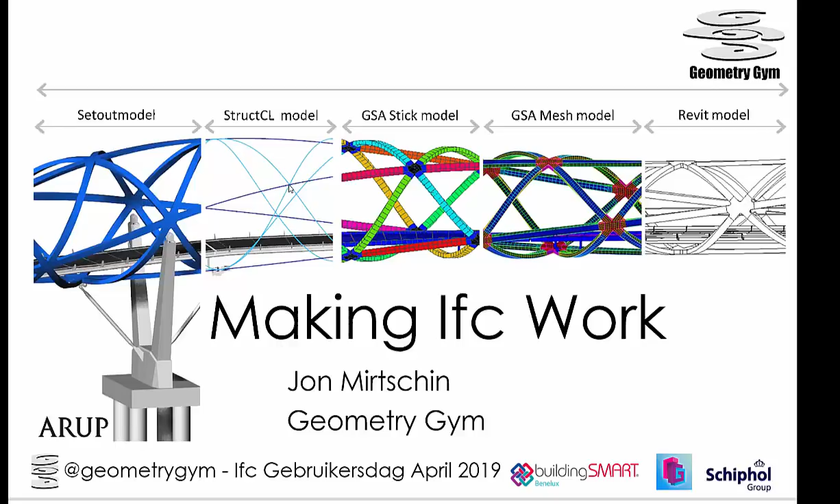Thank you. Unfortunately, my Dutch is very weak. Having done a little bit of work with Mark and Martijn, it improved a little bit, but more about what an air terminal is and a few services equipment rather than to be able to present in Dutch. So excuse my English.

A quick background to me. I think one of the key things that seems to be a point of difference or a point of benefit with myself is I come at this with dual experience and dual training. So you'll see that I actually studied a double degree in structural engineering and computer science. And I did work as a structural engineer for about 10 years at 2 different companies. And then I developed some tools that helped me do the tasks and jobs that I had to do on the projects that I was assigned.

I was pretty lucky, a lot of sports stadiums, an interesting footbridge or two, and a couple of towers. And I guess with a computer science degree working as a structural engineer, I wrote some spreadsheets and some little utilities and things like that that helped me do my job. And that kept snowballing. When I moved to London and worked for an offshoot of Arup called Expedition Engineering, I started learning about this application called Rhino and then getting more into actual plugin development and tool development.

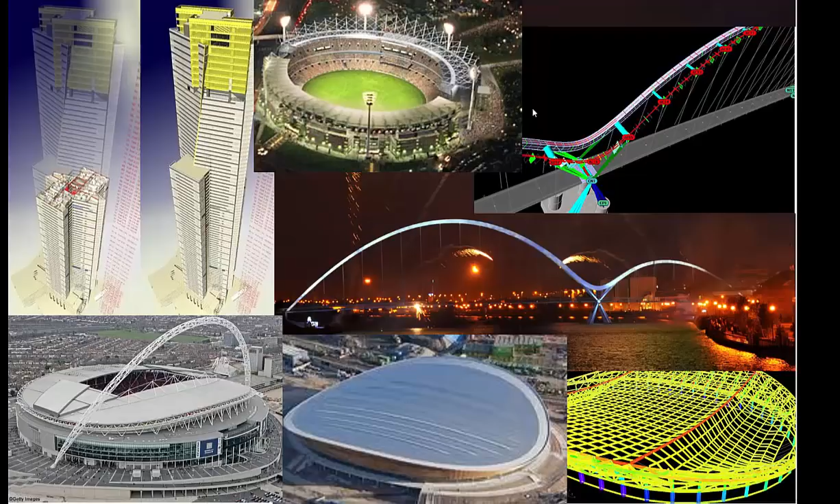Anyone that's used Rhino, which I'm going to talk about a little bit, will know it's a pretty powerful scripting and programming environment. So again, it snowballed. Others in the office started using some of the tools I developed for Rhino. I started letting Arup use them. And when Arup were dependent on it enough that I could start charging for it, I formed the business Geometry Gym. And nearly 10 years later, still working at it, which is great.

So just some other quick background information that might give some insights into some of the things I'm going to talk about. You'll hear I'm from Australia with an Australian accent. I am an elected board member on buildingSMART Australasia. I am involved with buildingSMART International, particularly with the Model Support Group. So the Model Support Group is in charge of managing the improvements to the schema and the IfcDoc tool that Alex mentioned and a few other technical aspects of supporting Open BIM.

And then the technical room, a common participant in that, particularly at the summits and the endeavours outside of the summits. Also do some consulting to Autodesk. I guess someone that knows IFC intimately and knows the Revit API a lot is something of benefit to them. So I have been involved with helping them with nominated tasks about import and export of Revit. Some of those were use cases that particularly came from here in Holland and in France.

So I saw a lot of discussion around the project base point export settings, and I don't know if I should put my hand up for some difficult questions, but I was involved in that. So depending on what conversations happen after this session, if you want to talk about that, it's possible.

Any presentation I do gets pretty technical, but again, I'm going to try and keep that capped today and, as Mark said, I want to demonstrate some use cases of IFC, maybe the way you haven't seen them before, and to explain what IFC is. No, not everyone should have to go into understanding IFC the way that I do, and we'll talk about some of the improvements that we should seek and demand to make that easier for everyday use of IFC as an exchange format or Open BIM.

Who here's seen the End of Babel video? Only a few. I think it's worth playing. It explains IFC better than I can. I can never watch this enough. So I've cut this down to a shorter version. And if you've seen it all before, I'll stall it if you like.

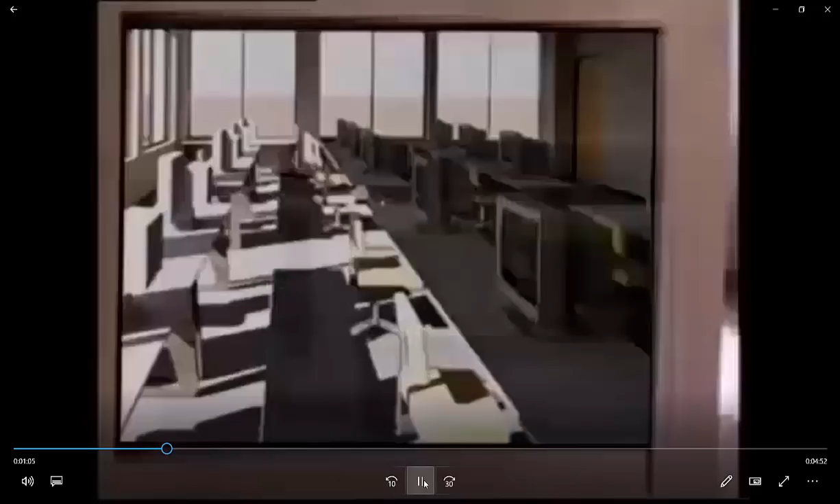But not too long ago, thanks to technology, there came along an amazing invention that actually made this problem worse. What is it? The desktop computer, of course. Everybody's got one of these things today, and we've all set about busily automating every task we can think of.

On a project like this one, for example, the designers have automated their drawing production, and the structural engineers have automated their calculations for determining the size of members, and the HVAC people have automated their calculation for thermal performance. But they're still not really communicating. You see, we haven't improved the processes that connect these tasks together.

And that's because the software packages that make this computer do its job are made by hundreds of different companies. And each software program has its own way of defining terms for the computer to understand. So they all talk to the computer, but they don't talk to each other, which means the people who use them can't do a very good job of talking to one another either, at least not with their data files and electronic drawings and documents.

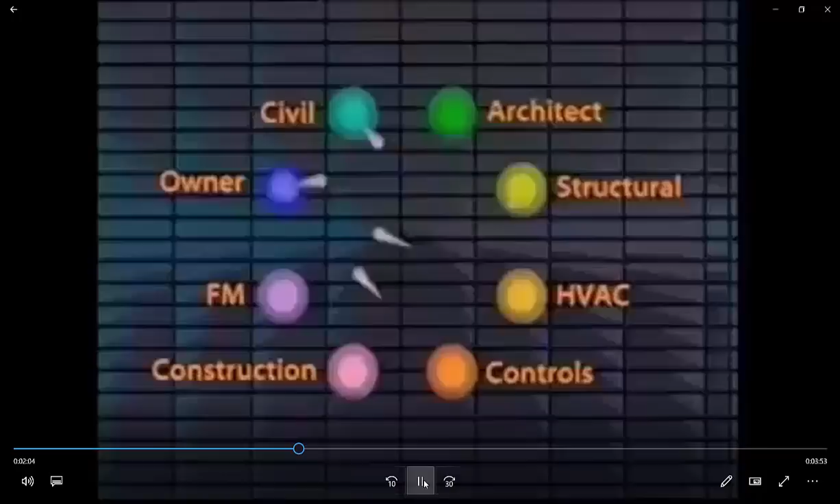And why is that a problem? Well, on a big project like this office building, for example, our fractured information system, this one we're all using, results in information that's often incompatible, inconsistent, or redundant. You can imagine what something like that adds to the cost of something like this. When you come right down to it, we're all wasting a lot of time.

For example, an architect does an initial design and passes it off to the structural and HVAC engineers. Now, they all work in parallel, isolated, making changes as they see fit. When they get back together to try to integrate all of their decisions, well, the results are something of a mess. It takes iteration after iteration to finally get it right.

But there's a move afoot to change all that, to make all of the software packages talk to each other, to make them all operate from a single shared building model that provides a common language for defining a building project, kind of a universal compatibility. It's being spearheaded by a company called Autodesk, in collaboration with industry partners such as AT&T, HOK Architects, Honeywell, Carrier, and Tishman Construction, to name a few.

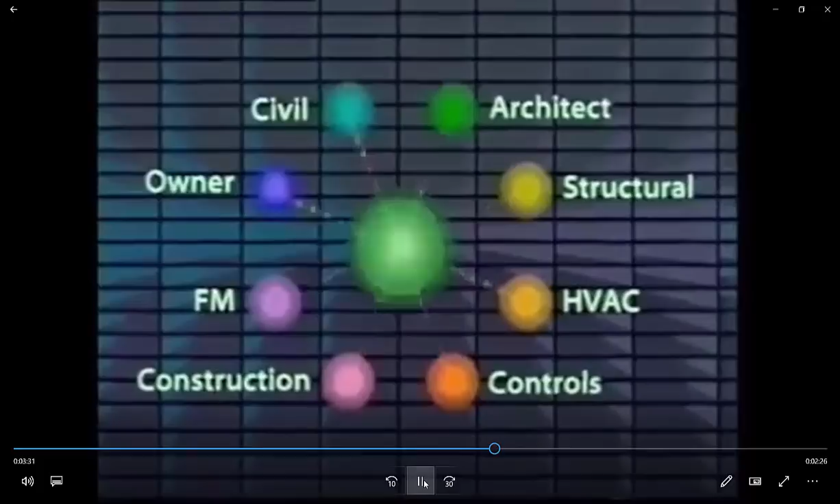The idea is to have industry-wide definitions for every object we use to design, construct, and maintain buildings, and then to create industry-standard definitions for the relationships between these objects. What we're really talking about is interoperability, making things work together no matter who creates them, no matter who's involved. Sounds like a good idea, so you've probably got just two questions. How much will this cost me, and when can I get a hold of it?

Well, it's not likely to cost very much at all, if indeed it ever costs you anything. The expense for the project is part of the research and development budgets of the corporations who are participating. The end result will simply be a new foundation within the software you buy. It will likely first appear as a feature of your next upgrade for AutoCAD-based applications. Then you'll find it in a growing number of non-CAD applications that can add information to the shared building model.

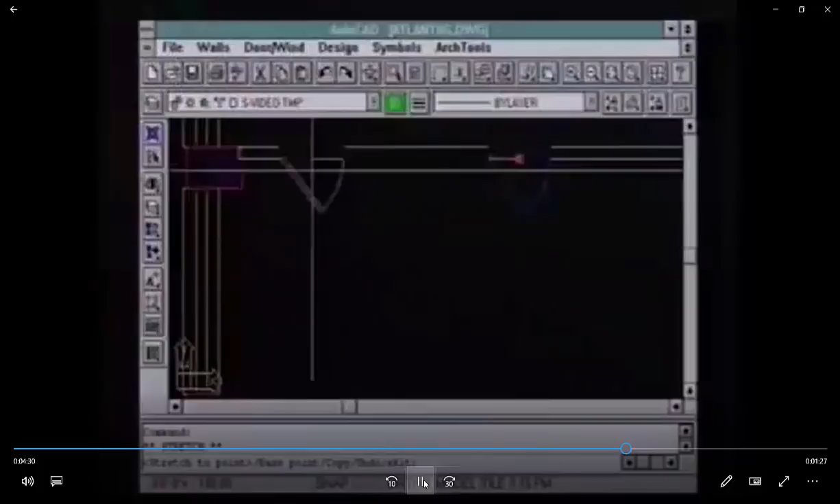It's easy to implement, so you're not looking at much for transition costs. There's no special hardware or peripherals or add-on software to purchase. In other words, it's more or less free, which is a pretty fair price for everything this project delivers, wouldn't you say? And now, when can you get your hands on it? Finished applications are still a few months away, but prototypes are already up and running. You can see them today at an Autodesk demonstration.

If you really think about buildings and the things in buildings, furniture, equipment, and so forth, you're really talking about objects, not lines on paper. Well, for the first time, the power of the computer and now the very imaginative creators of software are allowing us to come back and think about buildings in a fundamentally different way, as collections of objects. And the foundation classes are about objects.

Autodesk's goal is to lead the way to a place where technology works the way it's supposed to. Open systems and partnerships are part of Autodesk's corporate philosophy and have been since the company's beginning. They believe that having more choices is inherently better than having fewer choices. And that's what this alliance is all about.

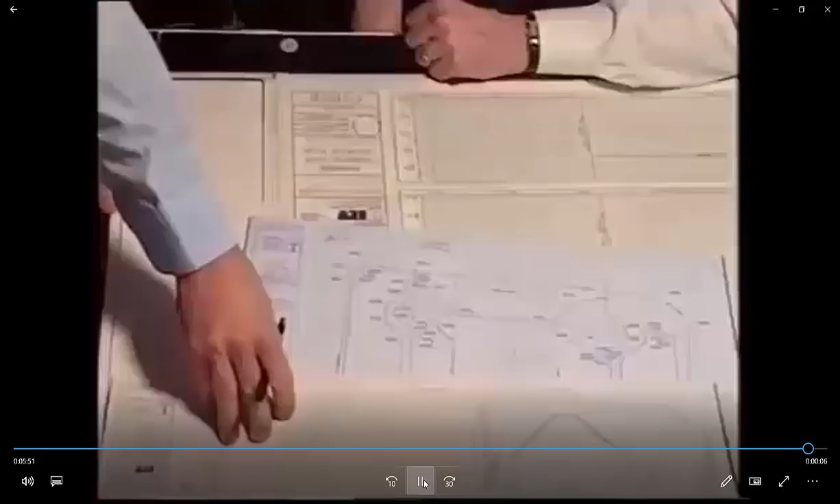They're leading the industry into the future, investing in new ideas that lead to better tools and better processes. This is technology gone right. This simple idea will let you capitalize on the promise computers made years ago. Finally, this will make it all work the way it's supposed to. It's an end to the technological Tower of Babel.

Apologies to those who might have seen that video before, but every time I watch it, I want to cry and laugh at the same time, because you might have picked up that it wasn't recorded yesterday. The message is as true as it's ever been, I think. This was recorded about 20 years ago, and it's a bit unfortunate that we're still working on advancing some of the promises and realizations made all that time ago.

I think it is great to come to Holland as well, because I really do see a strong push on Open BIM and actually achieving some of these goals. So it's nice to come here and meet many of you and have a chance to explain some of the work that I've been doing and Building Smart have been doing to make that a reality.

I mentioned before the use case of IFC, and in particular IFC 2x3, which had only one particular use case, which was coordination. Typically the model quality you'll then see is the model on the left-hand side. You only need a primitive model for coordination.

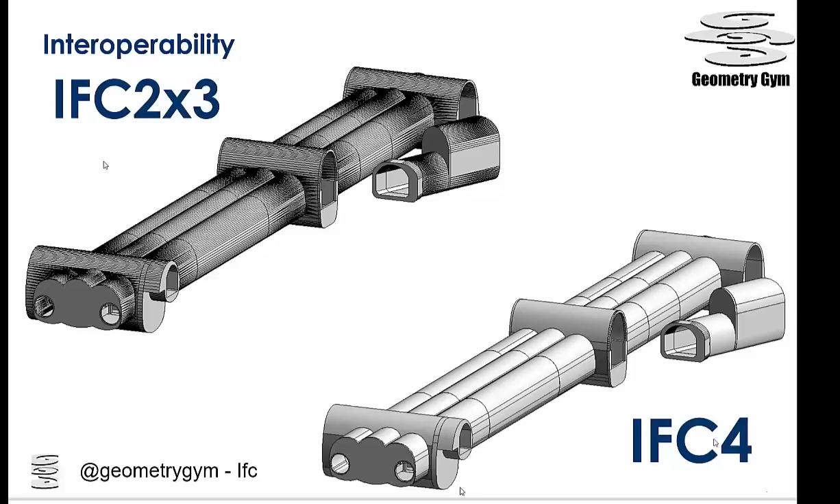I guess the emphasis of my work has been on design transfer. Coordination is an important use of IFC, but a lot of the work I'm going to demonstrate to you today is more about how do we actually use IFC for the more intelligent model use cases downstream?

I also think it's quite frustrating to be a user of IFC. With a hybrid background in structural engineering as well as software development, I can put both hats on. When you're producing IFC files that are gigabytes in size, that's not particularly a good sign, and it shouldn't be the case.

Again, I can only encourage you, if you are having frustrations and problems with IFC, put the pressure on your software vendors to improve these things.

Typically for IFC 2x3, the two primary shape representations used are an extrusion, or if it's not an extrusion, then just mesh the thing. Then if you get objects like fasteners or a light fitting or anything that's not an extrusion, you end up with these great big huge IFC files, because it meshes it normally to some sort of visualization tolerance, whereas a lot of what we're looking for in BIM is an idealized representation.

This is showing an example of some work I've done recently on decimating NURB shapes in Grasshopper and Rhino. I know in particular Revit have made some improvements in this area to try and reduce file sizes, but again, we can only push them harder and harder.

We really shouldn't be - if your file size is not proportional to the size, noting that IFC is a text file normally - it should still be proportional to the size of your native proprietary file, not magnitudes bigger. I'm going to talk a little bit about Generative BIM.

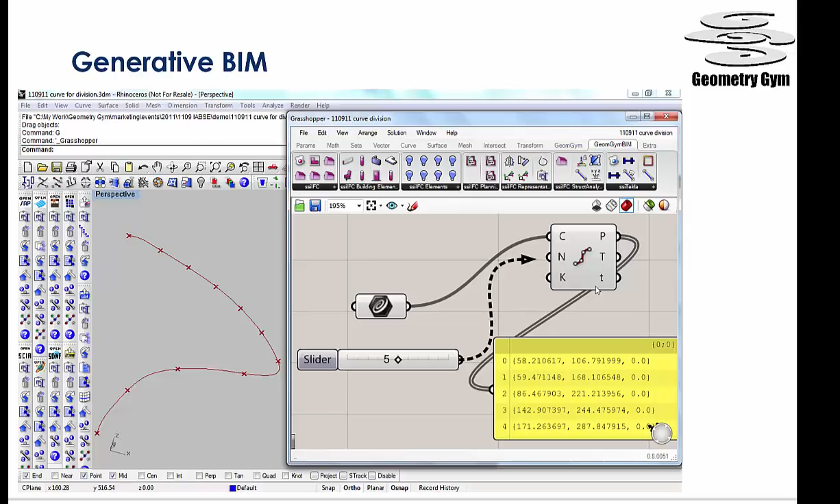I'm pretty sure everyone here would have heard of Dynamo as a graphical programming environment. Anyone here, how many have used Grasshopper? A few, good, okay. In my observation, Ian started Dynamo as he was using Grasshopper as an engineer, and he wanted Grasshopper for Revit, and that's what motivated and inspired him to start writing Dynamo. It has a very strong resemblance to Grasshopper, obviously.

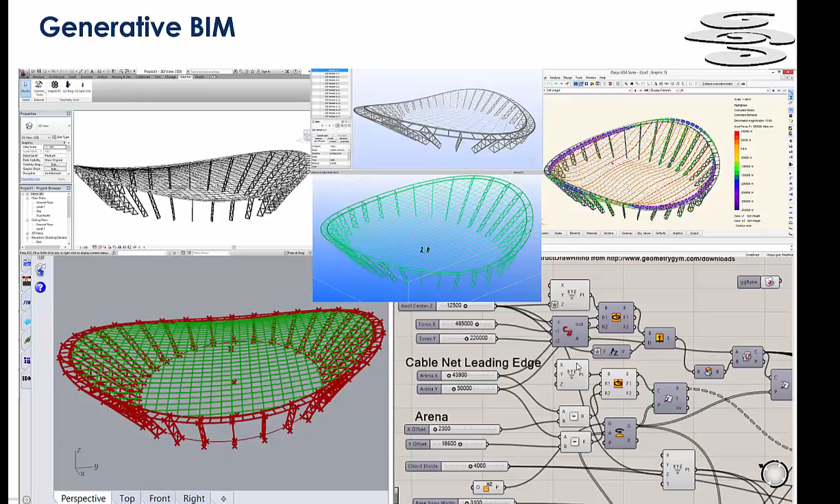It's a graphical programming environment where, instead of manually using menus and buttons to model a structure, it's more like a graphical programming environment. I think the big thing with Grasshopper is it brought programming back into the domain of everyday designers rather than computer geeks like me with a computer science degree. This is a really recent development that I've been exploring over the last couple of weeks.

It's now possible to run Rhino and Grasshopper as Revit plugins. McNeel has been refactoring this. If you've used Grasshopper before, a popular use case is connecting it with Revit. Dynamo ties in neatly since it sits inside Revit as a plugin, but when Rhino and Grasshopper run independently, you need other options to bridge the two applications. I've used IFC extensively, which is part of why I now have an intimate understanding of using IFC for design transfer. Other options include Speckle as a web server or Flux.

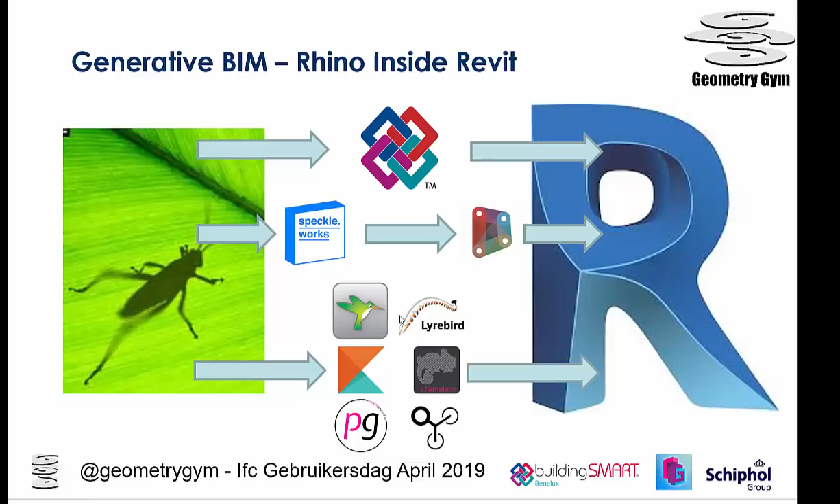Some of you might have used Flux. Often in that use case, they create primitive data, reassemble it in Dynamo, and then use Dynamo with the Revit API to recreate models or concepts in the Revit environment. There's also a whole suite of software using Excel, text files, or even pipes between the two applications to try to bridge them.

But this is a recent improvement where now we can trigger Rhino and Grasshopper as a Revit plugin. So you can recognize or use the Revit API directly from within Grasshopper. I think one of the big benefits of this route is that Rhino has a very capable and comprehensive geometry library that isn't necessarily the case in Revit.

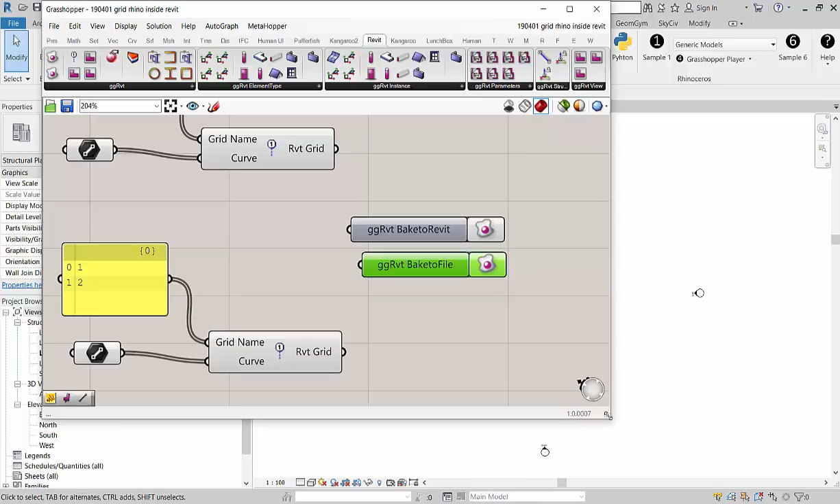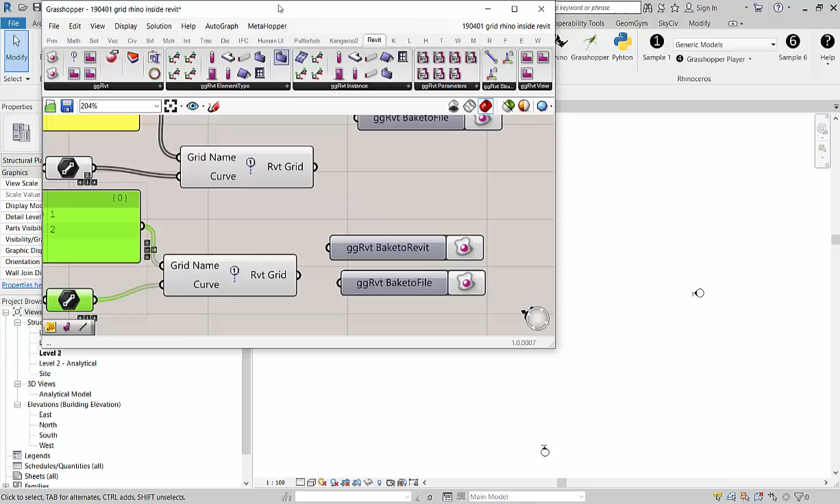What I hope to do quickly is demonstrate some tools I'm building around this. I can access the API directly in Revit, but I can also use IFC as a model store to hold these concepts without pumping the data straight into Revit. Revit was never designed to create a thousand elements one second and delete them the next - that's part of why applications like Dynamo have a Solve Now button or a staged solve. What I'm going to demonstrate here is the ability to explore your design in real time and then update Revit on demand.

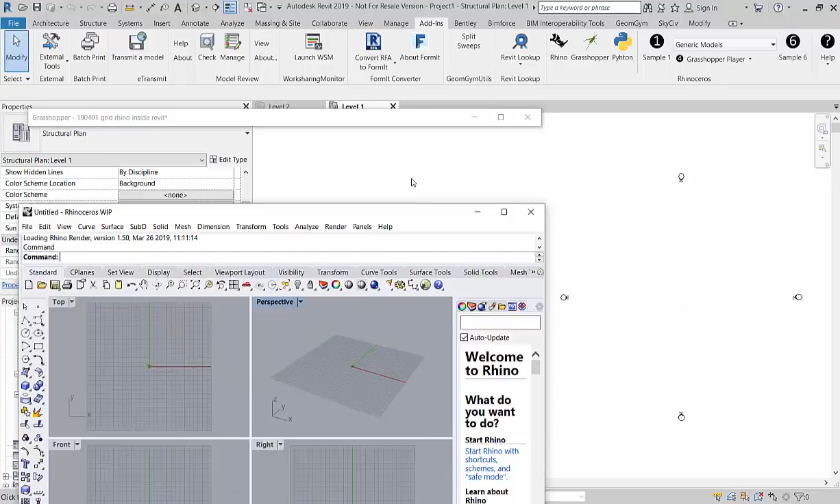I'm just going to quickly check I'm in the right view for Revit - maybe I'll change to level 1. My tools are still using IFC in the background, and we'll look a bit at the details of how it uses IFC for this. I have a pretty simple Grasshopper script here, literally making 4 grid lines - 2 in the Y direction and 2 in the X direction. It's not really doing a live link with Revit, but you can see I get a preview in Grasshopper, in the Rhino viewport.

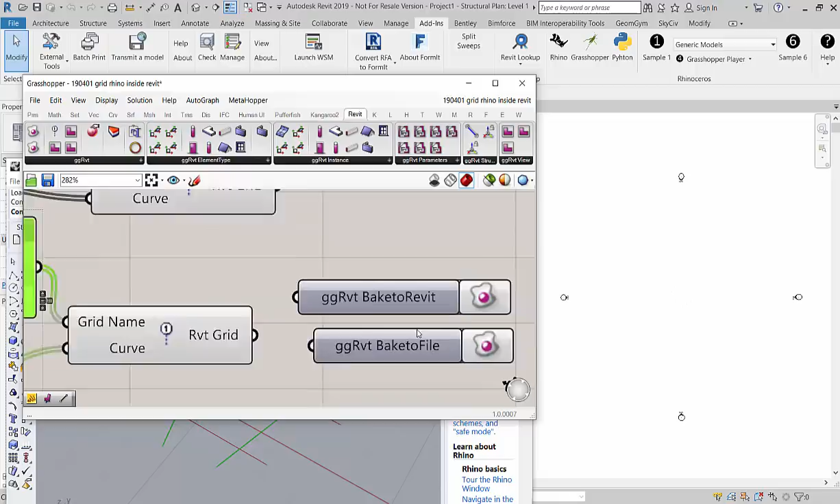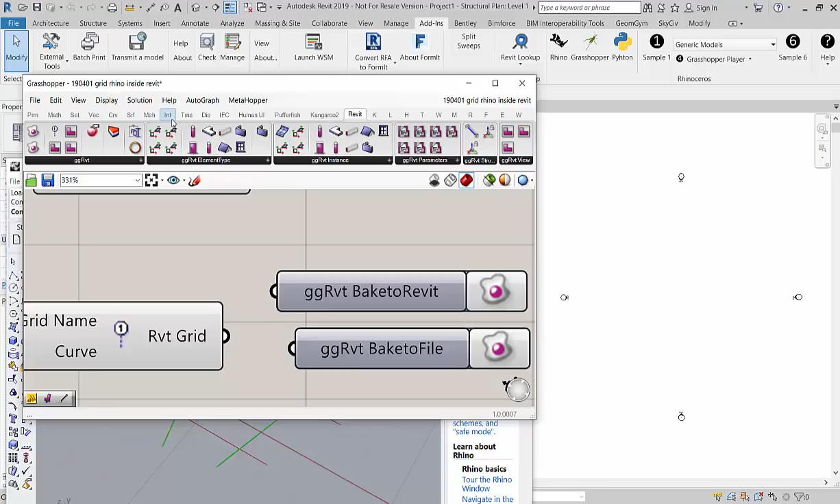Traditionally you always had to click bake to file, and my tools would then produce an IFC file. If we hover over the output - it's pretty small to see - my plugins are basically a front end for the IFC, using Revit terms and descriptions to create Revit concepts within the Grasshopper environment. But really it's just a wrapper over the original version of this plugin, which was hundreds of components, each relating to an IFC class. I'll explain more about what each class is in a second.

So instead of having to write an IFC file and use it elsewhere, I've developed my own IFC import plugin over a number of years - I started that before Autodesk open sourced theirs, otherwise it may have become a different situation. The emphasis of the IFC import plugin I've developed is that it's there to update and revise a Revit model, not just open or link an IFC file. So it has some fundamental differences in that situation.

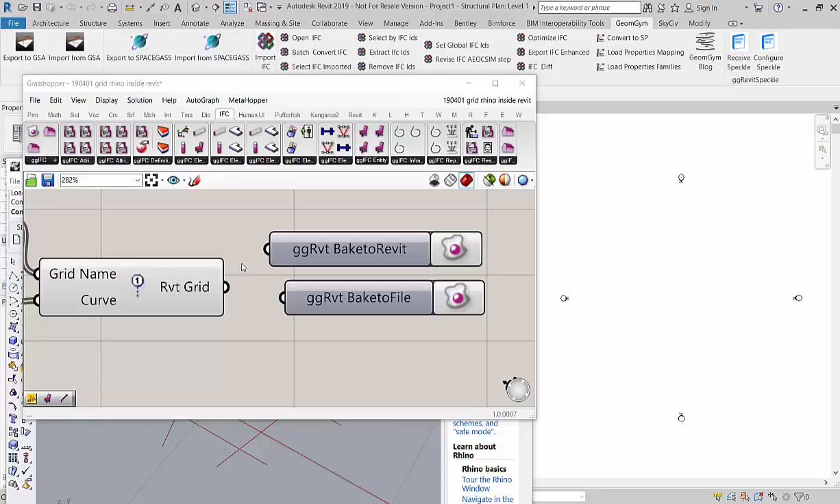Now I can click this GG Revit Bake to Revit component, and it should update and create these grid lines here in the model. Let's see... okay, now you can see it's created those 4 grid lines directly. It did use IFC in the background - the Grasshopper model passed the IFC definition to my Revit plugin, which then converted these concepts into Revit concepts on the fly within that Revit environment.

Now, of course, if I'm a structural engineer and I want to start setting things off these grids, then maybe I want to start to place columns at grids. And when I do that, if I actually go and manually move a grid line location, we get an automatic update of the position of the column because it's constrained to that intersection of those two curves.

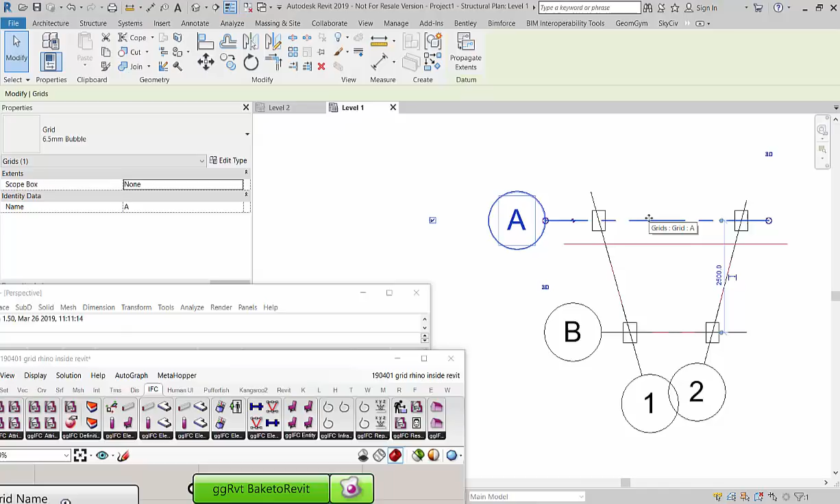You can see here that the Grasshopper preview has kicked in, so I can actually see where it's out of sync with the Grasshopper. Of course, what I might like to do is have a bit more notification about when the Revit model gets out of sync with the Grasshopper definitions here. But again, I can actually replicate that grid moving process directly in Rhino.

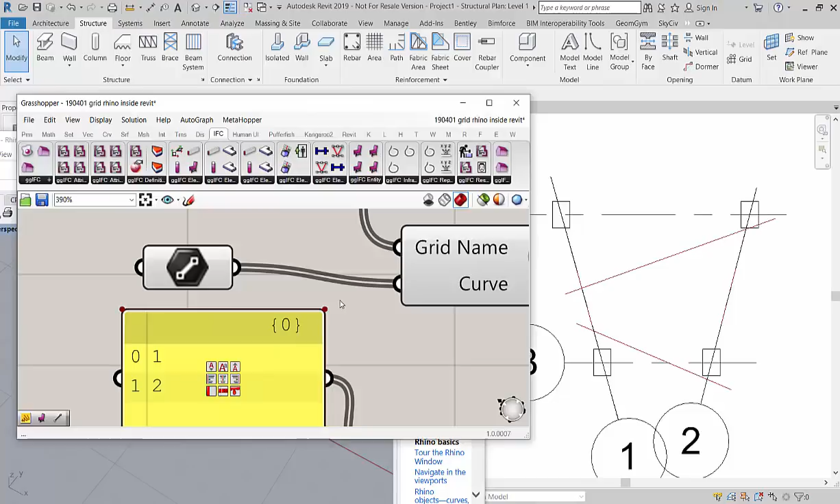So if I want to change the grid location so it looks something more like this, you can see now the Revit update has changed and shown me the proposed grid locations. And if again I bake to Revit, we see that it actually moves and rotates the existing grids into the positions. So those columns that I manually constrained are now still locked and hosted on those locations.

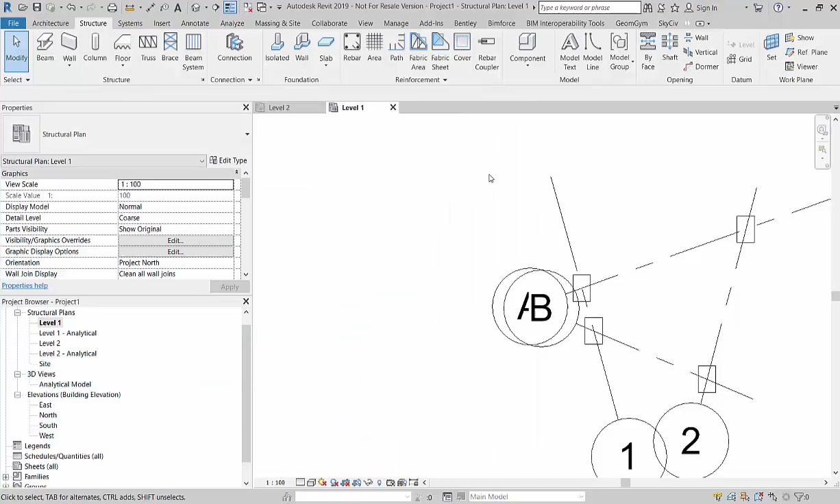I guess some of the benefit of this, if I'm the engineer in Revit and I don't like that change, I can simply undo and go back to the previous version of this, etc.

I think one of the other benefits about this sort of approach where you use IFC is I could actually make an archive copy of that model during that workflow. If I want to capture what was sent between Grasshopper and Revit over the duration of the program, I could just write a bunch of IFC files each time I triggered that exchange, if I ever had to go back and revisit that for whatever reason there might be.

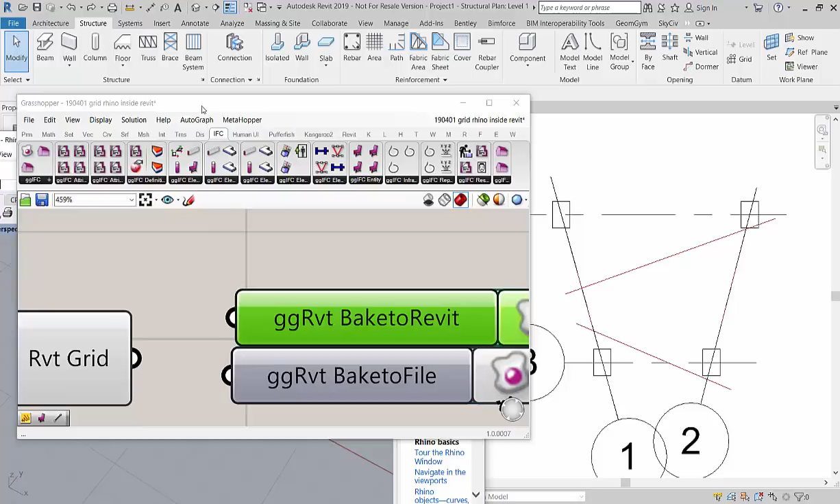Okay, so that's simple grid lines. I guess what I wanted to start to show then is IFC.

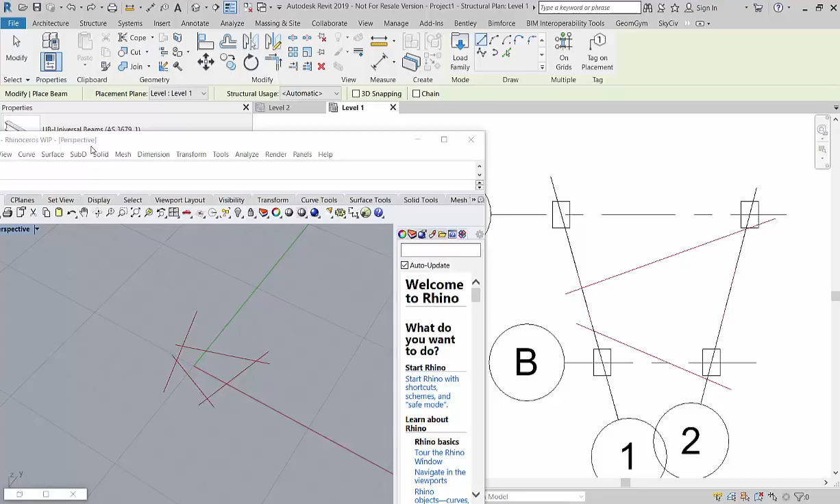Now, if we want to get intelligent Revit models out of an IFC diagram, then what we should actually achieve is instructions that would operate Revit the same way as if I was a manual user. So if I was going to create a beam or a framing element in Revit, as a user I would click on the framing button, then choose whatever family, and inherently with that family it would know what material, whether it be concrete or steel.

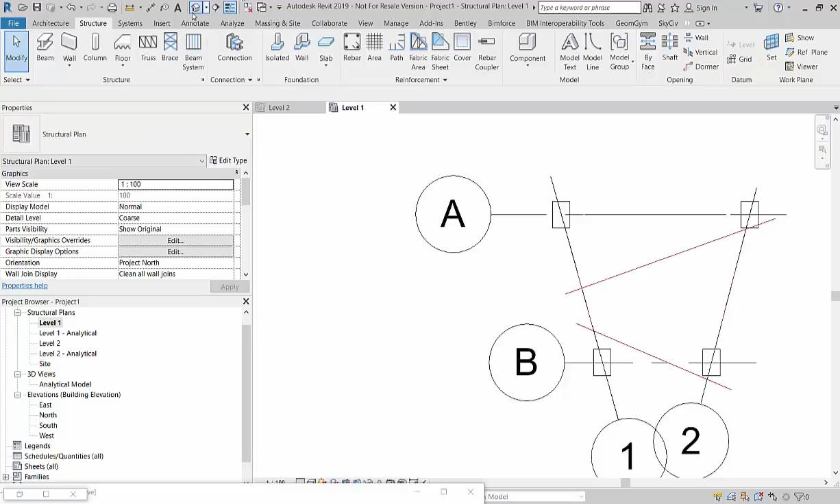Or what, at least what the default option should be for that material of that object. And then I'd nominate the location of the beam or the set-out axes, so I'd pick two endpoints and I'd get an extrusion representation of that beam there directly in the Revit model.

Now, if we're actually going to import IFC into Revit and we want to get a native Revit beam that you can actually update and change, then what we'd have to say is that the IFC would have to provide those same inputs that I gave it manually when I operated the Revit application. And I think that's part of the frustration when you go to import an IFC file.

If it's actually already meshed that shape, or if it doesn't actually give those inputs consistent with the way that I fed them in as a user, then it's hard to expect Revit to make a native Revit beam out of a dumb instruction. And that's, again, part of the reason.

When you use IFC for coordination, it doesn't necessarily have a lot of intelligence in the model. It might just literally say, this is how you can preview the geometry. And that's why you get these direct shapes or objects in Revit when you import or open an IFC that you actually can't change and edit. Okay, does that make sense?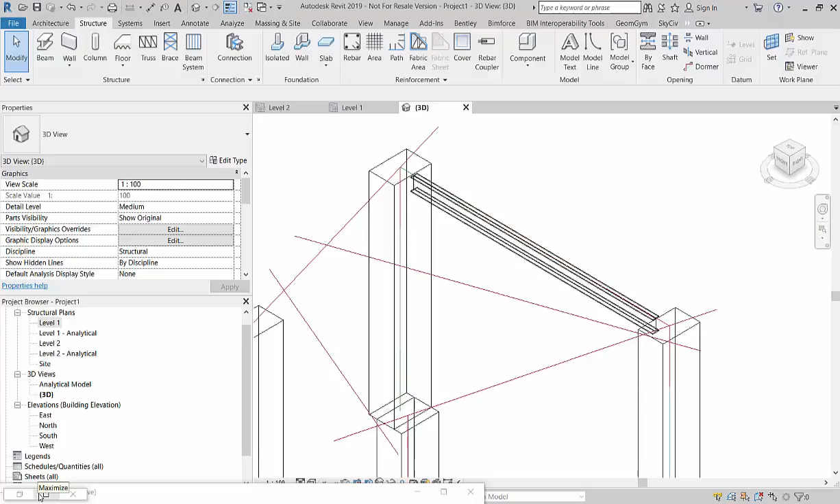Okay, so what is IFC? Let's have a little bit more of a look at the nuts and bolts. Not that I think you guys should really ever have to do it, but it might give some context, and hopefully this demystifies IFC a little bit for many of you if you haven't ever gotten into the nuts and bolts.

So here's another Grasshopper script, and all this script really does is also make a framing object the same as I did when I manually made that. So you can see the inputs, and you should recognize that these inputs I'm giving to the Grasshopper script are pretty much a replica of the steps that I did from the user interface to create that beam.

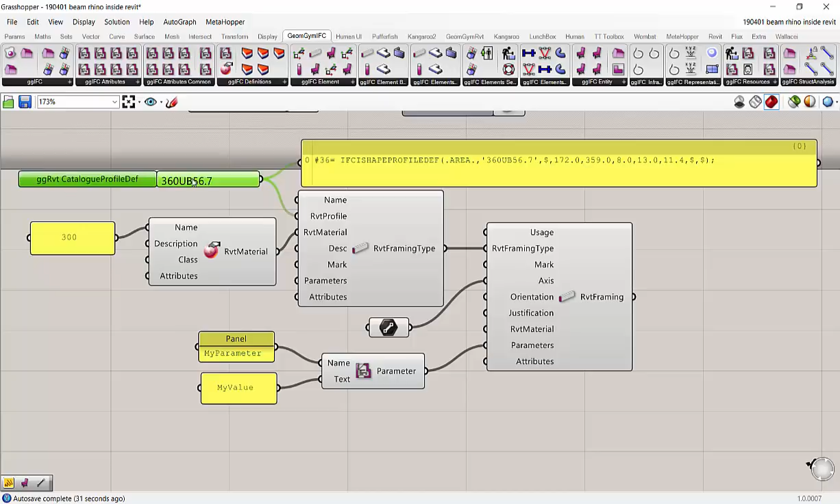So I have a catalog profile definition, which is telling me here it's a 360 UB 56.7. So it already has a database which knows here's the depth of that I-shape, here's the width, the flange thickness, the web thickness, the root radius, etc. And IFC is a technology that's about 20 years old, commonly expressed in this STEP file, which we'll look at in a second. If you've studied IFC, there's an order and sequence to this that, having programmed IFC for a while, I would recognize what each of these represents in defining that I-shape.

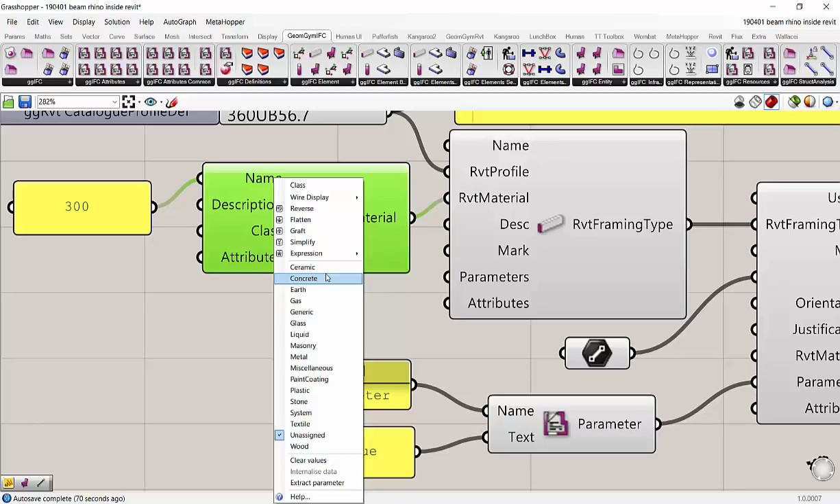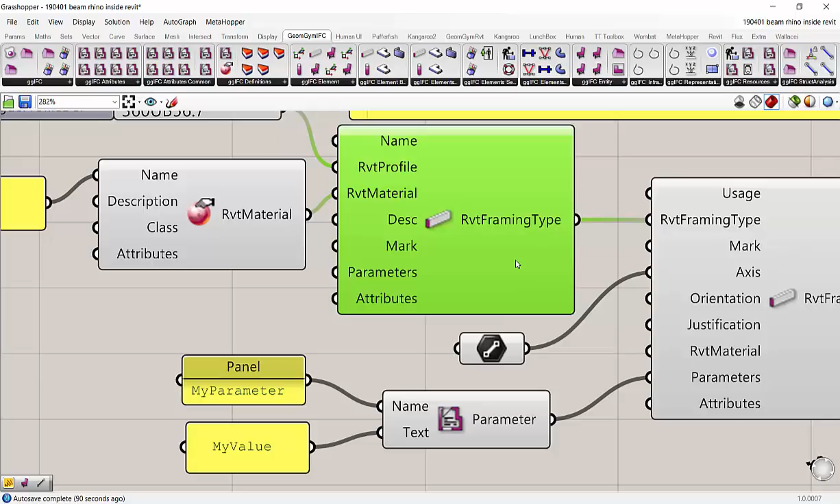I also have a definition of a Revit material. Some of the things I put on is an enumeration, so you would recognize the class of the material, which you could select from a context menu. So I'm feeding in a member and a material, and then building a family or framing type off that information. Again, here we could add parameters, like a type mark. It's trying to provide the inputs to the Grasshopper programming environment the same as I would if I was actually editing the Revit model.

Finally, I'm making an instance of that framing object. So there could be something like the usage, whether it's a girder or a joist or a purlin, the mark, the axis, the justification, whether I want top or mid. This is one of the big improvements in IFC 4. In IFC 2x3, pretty much everything is extruded around its middle axis. But in IFC 4, they started to add justification, so you can control the position of the profile relative to the axis curve.

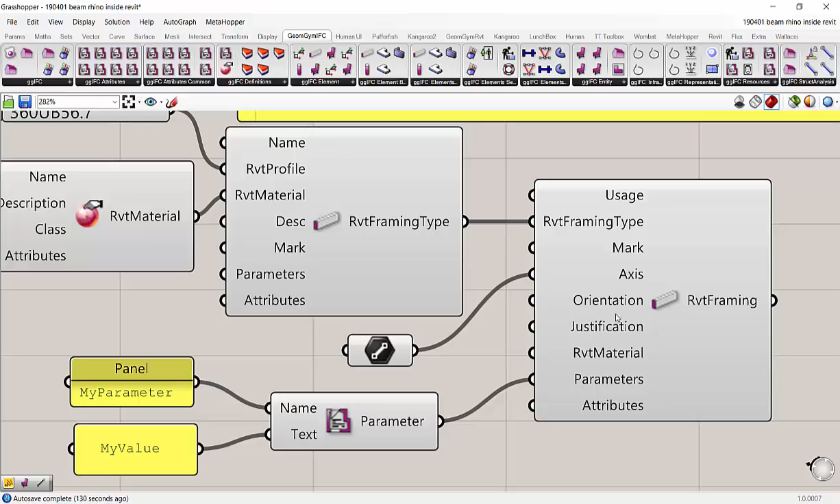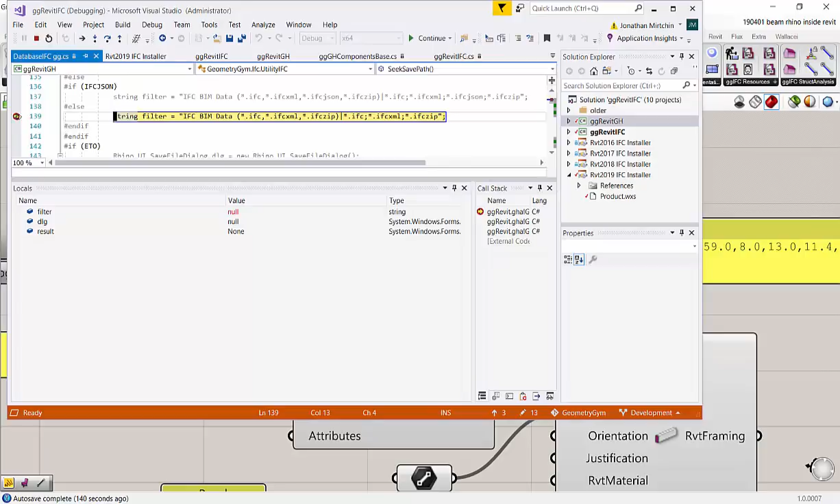If I wanted to override the material, I could do it, and if I want to set parameters, I could also do that. So if that makes sense, you can see that effectively I'm making a beam through the Grasshopper instructions. And if I click on this ggRvt BaketoFile thing - I'm in debug mode - it will prompt me to write an IFC file, and I'll overwrite this file I created earlier.

Okay, so if I go and find that file - as I said, the way IFC is commonly expressed came from about 20 years ago when things were stored on floppy disks. I guess the cutting edge technology they selected was using STEP, which, again, you can recognize these keywords. Each one of these is a class or concept in IFC.

If we scroll down through this, we'd find some things we might recognize, like the units - this file's in millimeters. We'd find some properties, and if we look hard enough, we'd find a material definition, a member type or family, the member definition, and then maybe some other properties, like the one I created manually. Now, that's all right for me as a computer scientist to sit and study and read, but the average person should never have to worry about that detail.

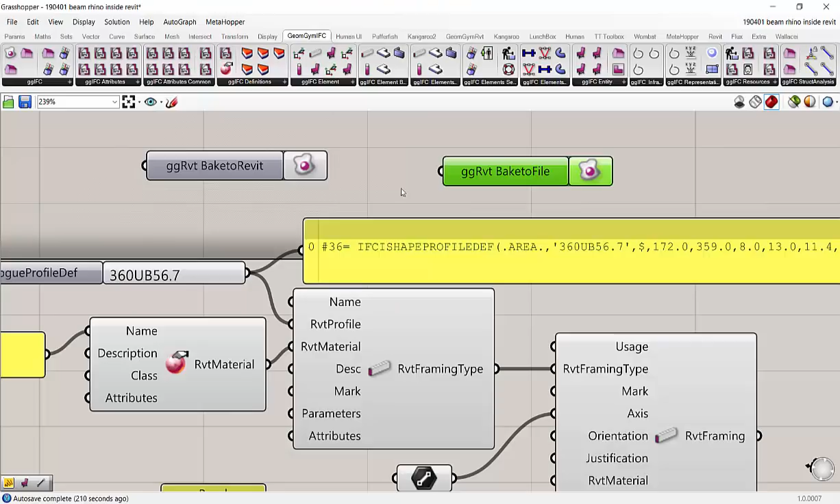One of the other superior options for trying to capture that is writing it as an IFC XML file. The IFC XML file is more modern, and it's a bit more human readable, in that every attribute gets tagged, so I don't have to know the order of the attributes. Again, you can nest these things through relationships, although I'm not necessarily doing this strictly compliant with the IFC XML schema.

But we'd recognize here's a building, and the building might have stories, and the stories might contain elements or spaces, and you can actually view the IFC Model Hierarchy. We can see here we've got a member, which is my framing object, and it's got a related material or a profile - here's the I-shape with its web thickness and flange thickness, etc. It's got a placement and other attributes down the bottom, which would include the units, etc.

So I wouldn't actually recommend that the average Revit user, or anyone interested in exchanging IFC, should need to go into the nuts and bolts of this. But it is a superior way of starting to inspect the contents of the IFC file, because I think one of the most frustrating parts of using IFC as an end user is that when something doesn't work, how do you validate where the problem is? You get one software vendor pointing the finger at the other, and you're caught in the middle about whether the IFC file is correct, and whether it's an authoring problem or an importing problem when you're trying to troubleshoot these things.

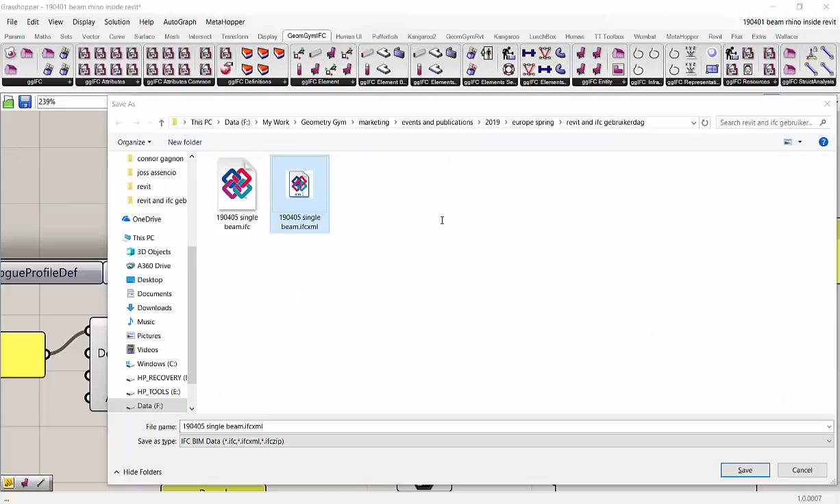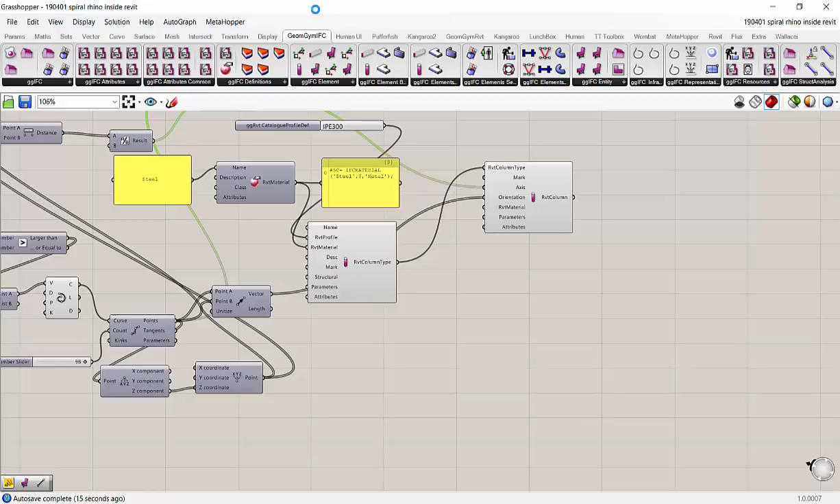Okay. So just to show an even slightly more complex example then, I guess. So again, as I mentioned before, I think Grasshopper and Rhino are actually industry agnostic. So you could very well find that your shoes have been designed in Rhino, your jewelry, marine. It actually came out of marine for ship hulls. And it uses splines or NURBS, which is one of its biggest features.

And so what I've started to set up here is a script which actually creates a spiral in Grasshopper, and then starts to set up a bunch of columns that actually get set up off this spiral. And of course, I'd like to orient each of them so that they basically face either perpendicular to the curve or into the origin of the model as part of this workflow.

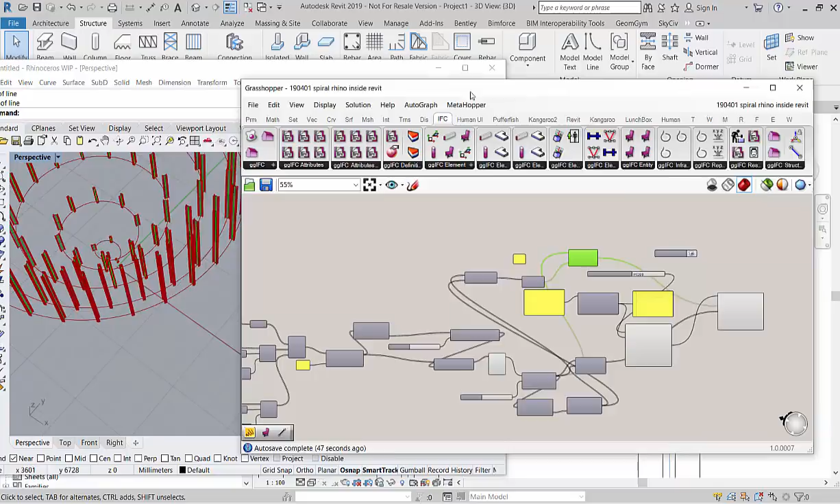And because I'm not trying to do a live link with Revit, I actually in real time can see a preview of these changes in Grasshopper as I do it. So if I want to reduce the number of columns being created, then I can move this slider, and basically in real time, you get this updated preview in Rhino.

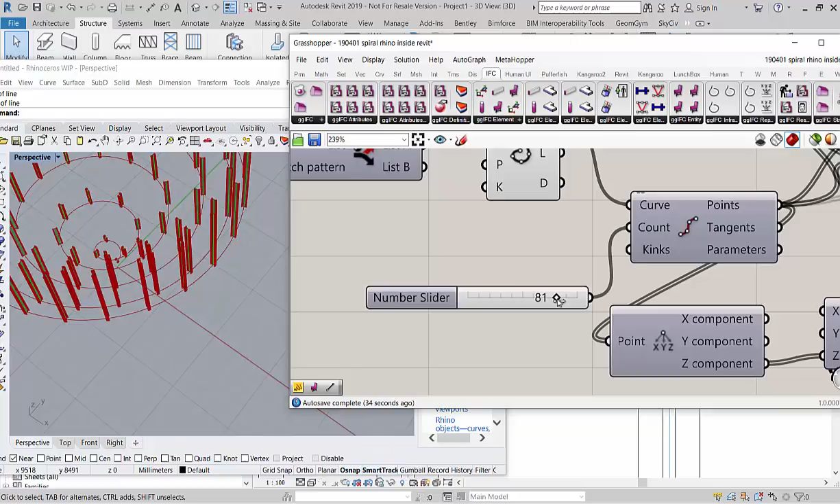Rhino's not technically, I mean, I guess where you draw the lines on these things, I don't know, is Excel a BIM authoring software or not? But you know, Rhino isn't technically BIM, so all it's really concerned about is visualizing or representing that object, and then I'm storing all the other attributes in the background. So it's a little bit different to trying to, in real time, update Revit, which is also then trying to maintain a whole bunch of other relationships and associations as you try and push that data into it.

So the idea then being, if I zoom out, is we should see a preview of that spiral. And we probably should see, again, the column position line. So at the moment, it will actually preview mesh, but it won't preview the extrusions that I'm drawing there. And these obviously aren't things I can select. They're basically just being displayed on the Revit viewport.

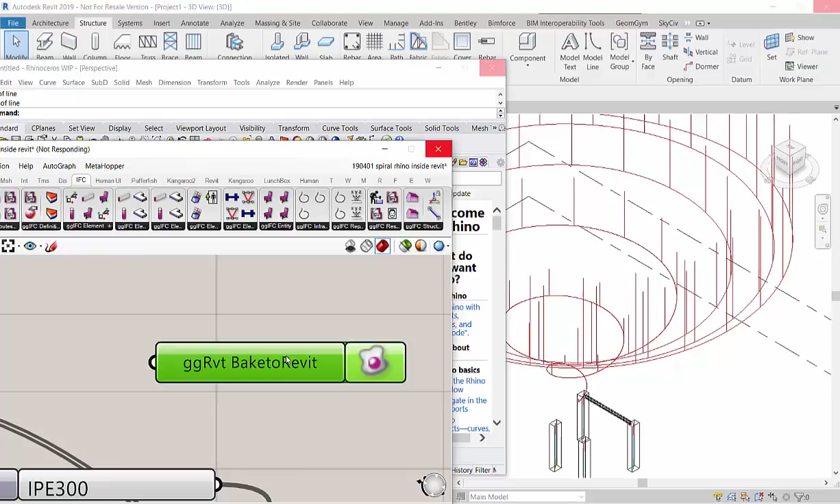I guess then, if I've settled on this design, and this is what I want to send to Revit, then I can click on the bake to Revit component, and what it's going to do is add however 80 or 90 or however many I'd set that number slider to columns to the Revit database. Again, it's sort of a 6 or 7 second sync time for about 80 or 90 objects. And again, I'll talk in a second. You can do this in a live link, but you do start to get this lag where it's constantly trying to change the Revit model, which isn't necessarily so user-friendly with the work that they're doing.

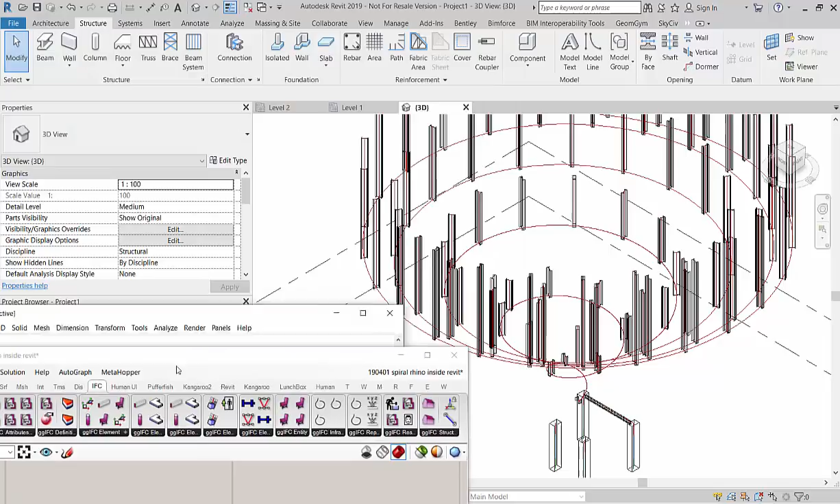But now you can see it's actually added the column objects to Revit. These are native; wherever possible, I'd like to make a native object. At some point in time, a parametric model normally gets locked off, and all changes and revisions get done manually thereafter. So ideally, someone should open this model in 5 years' time or 10 years' time or next week and not tell if it was actually created by my plugin or by another user previously.

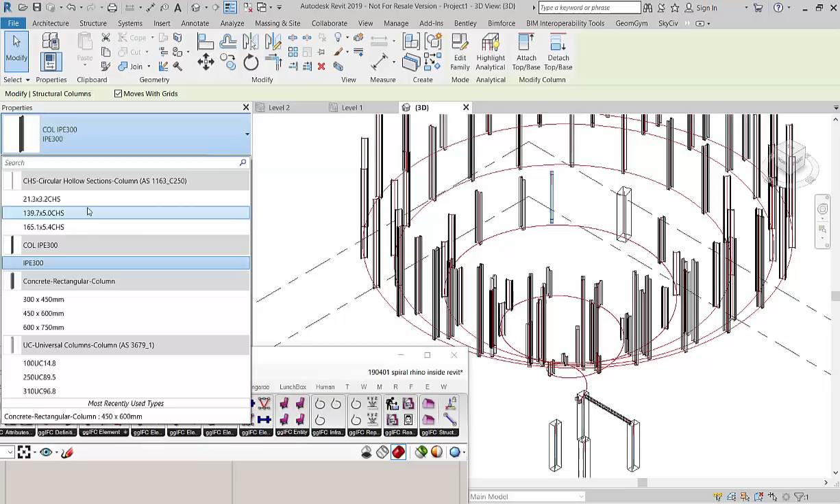So I can actually go in and start to edit, move these things around, change the family assignment, etc. I should be able to start tagging them, adding extra properties that I wouldn't necessarily want to generate in Grasshopper, and do various other tasks that might like to be done downstream in the Revit environment.

Now, this export isn't just a one-way trip. Well, one, we can actually round trip the data back. One, you can actually reference the Revit API in Grasshopper now. So let's touch on that for a second.

So McNeel themselves have now started to build their own Revit components, which load when you run Grasshopper within Revit. And some of these then allow you to pull objects out of the Revit database, the same as you can reference them in Dynamo. So if you want to reference, here's a family picker, or here's a level picker, or here's find an element by name or by ID, then you can start to reference those things directly in the Grasshopper environment.

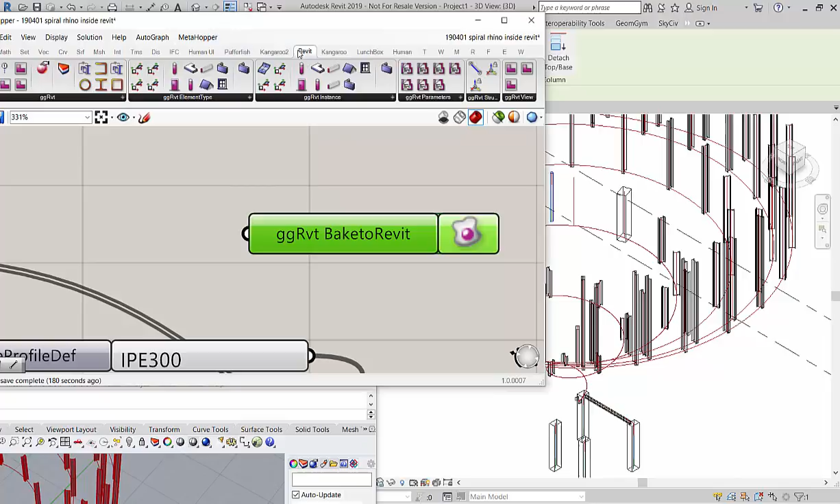My sort of approach, and I guess I'm Mr. IFC in many ways, is instead you can actually write an IFC file and then import the IFC file context back into the Grasshopper environment. So that's sort of one way of round tripping the data.

I'm also really concerned or want to enable the ability to update and revise the model, not just generate it once. And the way that I've been doing that is, anyone that's looked at IFC might have noticed that every element has this funny looking string, which is a unique identifier. And that is basically one way of actually identifying an element from one version of a model to another, or what is represented as that object in a different context or a different model.

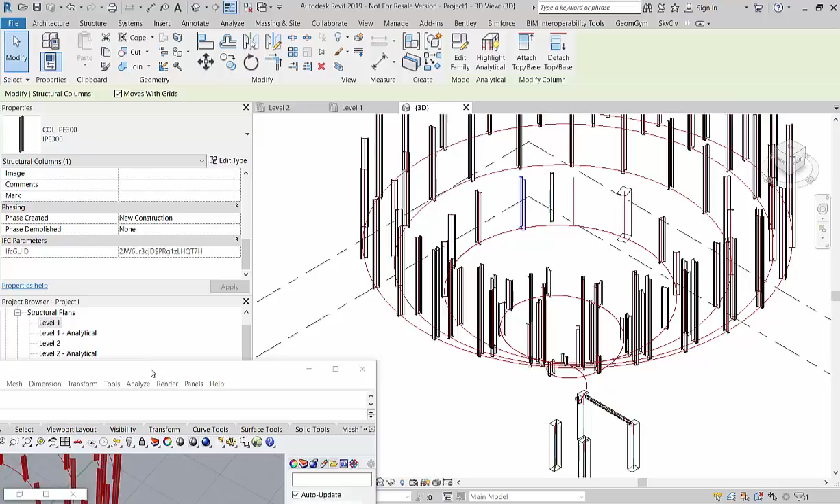And so what happens is then, if I go to actually revise the Grasshopper script, if I now say maybe I reduce the number of columns being created, what I really want the plugin to do is, one, move every column that's already there into its new position, and two, delete any of the obsolete or redundant columns that still exist in that model that are no longer associated in this Grasshopper script.

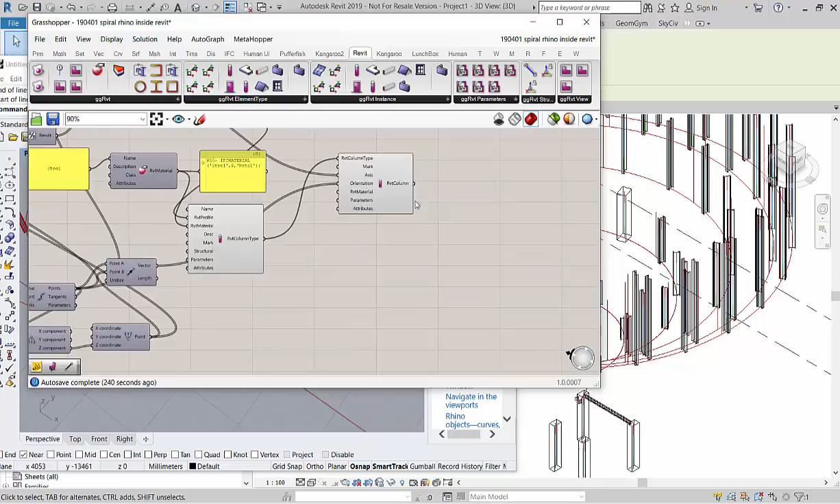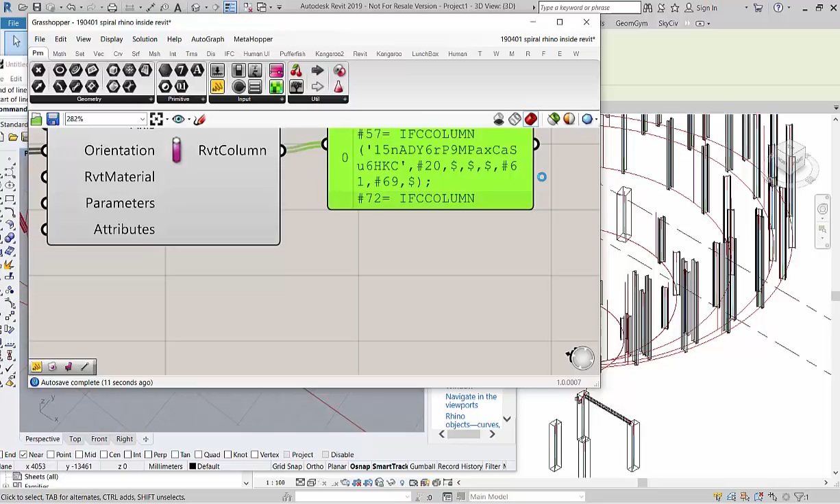So if I have a quick look at the preview of the objects coming out of this Grasshopper script, what we'll see here is these list of funny looking strings being prefixed on each of the columns that are being generated. And each one of those now, when I go to update Revit, will search for that element with that unique identifier string, and then move it or delete it if it's no longer live in this Grasshopper context.

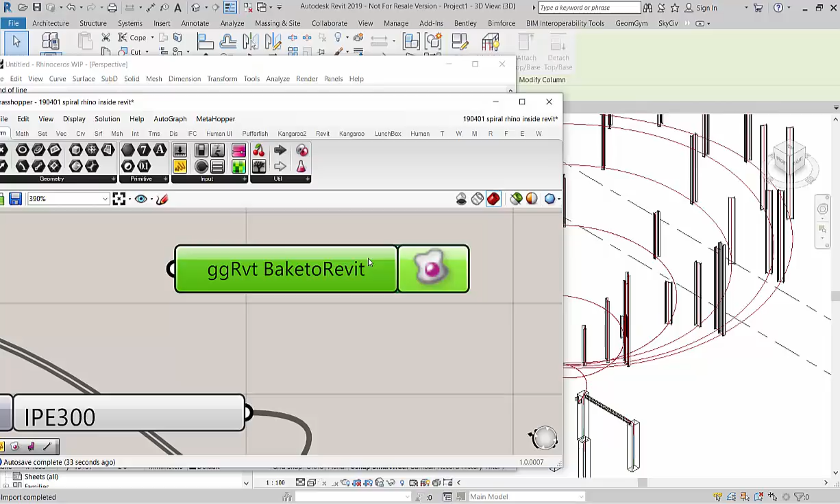So if I click on the ggRvt BaketoRevit component again, what it's going to do is it basically has assembled a list of all the unique identifiers that are now no longer used. And we should see that, because the family and the profile is being dictated from Grasshopper, those couple of columns that I changed and moved location for reverted back to the Grasshopper nominated profile and were moved back into their original position.

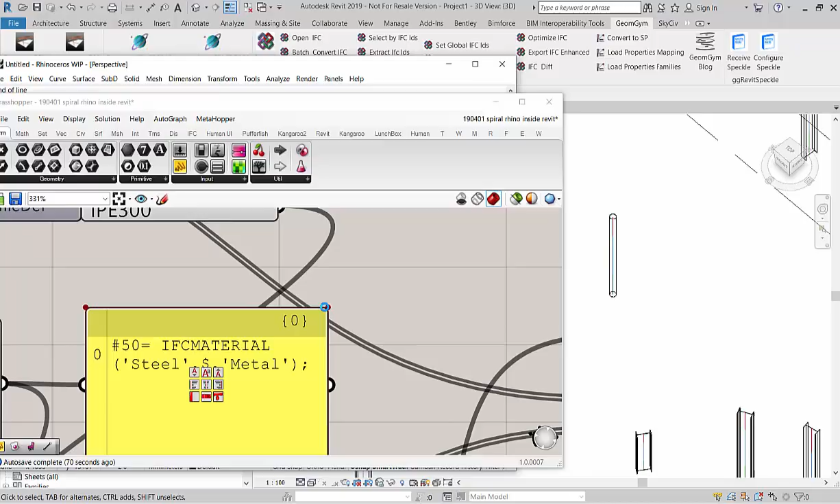If I wanted to prevent that, I can actually do that. So let's say I want to copy this column, and let's make it obvious by changing its profile size. Again, in my IFC importer, there's a bunch of tools for managing some of this stuff. So if I want to remove the IFC unique identifier so my plugin would never recognize it, then I can click on Remove IFC ID, and now you'll see that that parameter has been blanked out. And so if I come back to Grasshopper and update and revise this model, this column will no longer be recognized, and it will be retained through the update process.

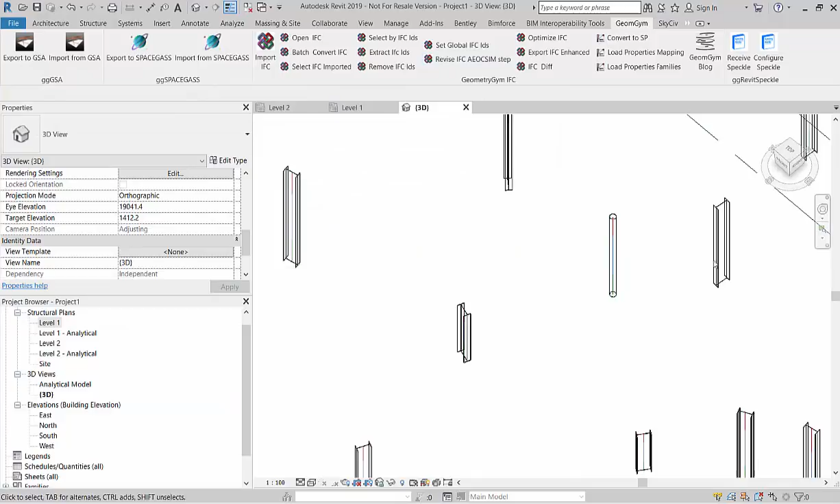So if I click on the bake, then we'll see a new column. Well, that's interesting. Let's see, it should still work. And this is brand new, I've got to say, this is literally only a week old. So if I now let that error message through, then I do get a new column in that position. But because I broke that association with the Grasshopper script, that column would never be touched again unless I reset that unique ID.

Okay, there's a few other utilities in the IFC plugin that I've got. I think it's not very nice that you can't manage the unique identifiers for the project, the building, and the site in Revit. So one of these components here is to set global IFC IDs. So if you've got a client, like Schiphol, and you've got to give this unique identifier to this building or this site, then you can now control that.

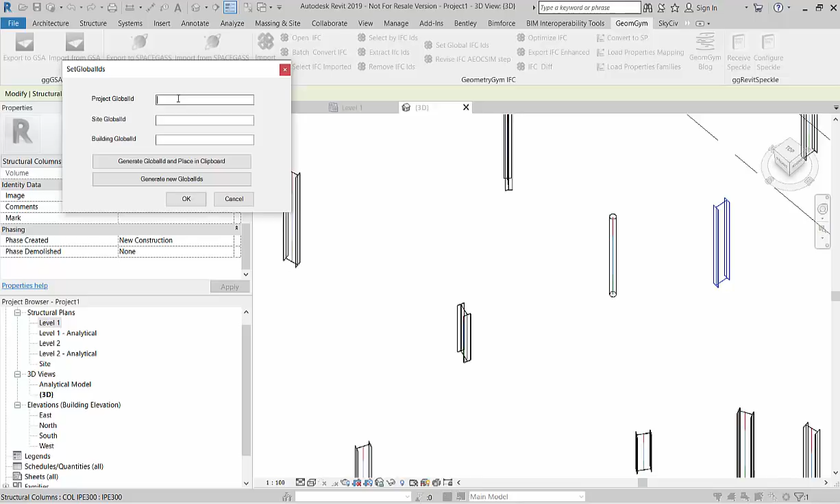You can select things by Ifc Ids. You can extract Ifc Ids. So if I want to know what the Ifc Ids are of these columns, I can click on here and say extract Ifc Ids. And then if I go back to Notepad and then paste, then we should see these unique identifier strings formatted into clipboard for that.

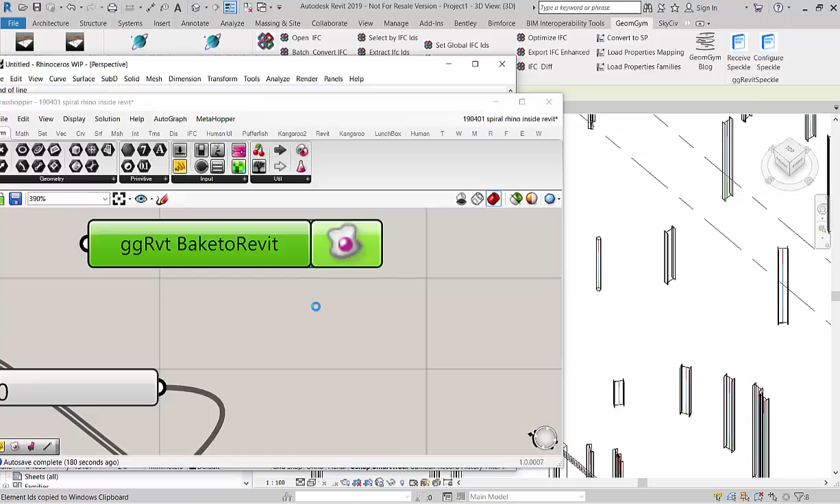The other thing actually I want to do is make this update based on mark. So if we controlled the mark in the Grasshopper script on each of these elements, rather than rely on that unique identifier, we could actually then update things recognized. One of the inputs here on the column is we could automate the generation of a mark on each of these columns, and maybe that should be the key about how to identify an object from one version of a model to another, rather than managing these strange looking strings that are pretty difficult to recognize.

Again, there's also a bunch of stuff that I've been doing, consulting to Transport for New South Wales, that we might talk about in the next breakout session. But even how a client, again, we can use shared parameters file definition to define what are the parameters that we should have loaded in our Revit project. IFC4 provided new classes to manage property templates, which does have a global ID. It can tell you the units, it can tell you various characteristics, etc.

And I've been developing some tools that allow you to load that in effectively as a shared parameter file, so that you can actually use those properties from a neutral open BIM format, rather than a client like Schiphol saying, well, here's a shared parameter definition file. They could publish an IFC template which has those definitions, which could then be used in or recognized in ArchiCAD and Vectorworks and AECOsim, etc., etc.

Okay. Yeah, please. Great. Yep.

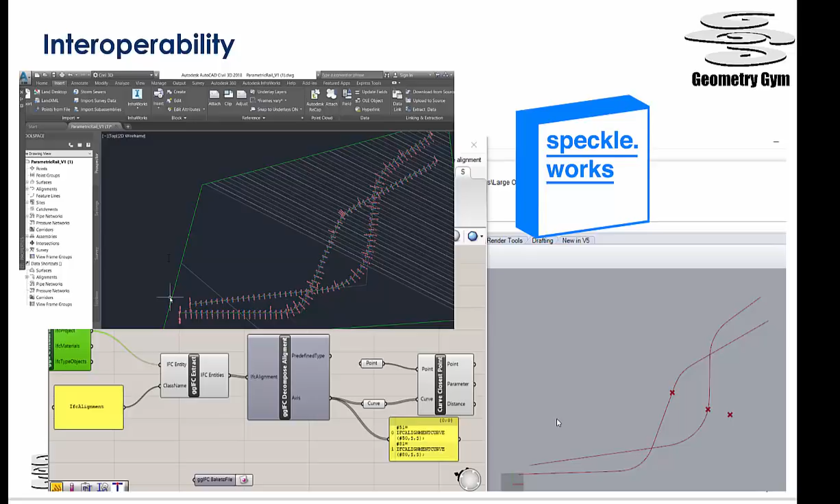This is showing an example of actually an Ifc alignment. So these are some of the concepts that have been published, and a lot more are coming with the road and rail and bridge enhancements to the Ifc schema. So even the ability to then take a Civil 3D alignment and then reference that in Grasshopper and parametrically set out a bridge or something through an extent of it can be quite a powerful workflow. So I guess the emphasis of my work for the last 10 years has really been about interoperability.

So I guess with a structural engineering background, particularly the early emphasis on the tools was all about building structural analysis models primarily from Rhino, and then quickly turning attention to BIM and sort of how do we bridge Grasshopper and Revit, which is something that I've sort of been providing for 6 or 7 years.

And again, this workflow with Arup basically went through to the documentation model with Revit. We actually also did get the workflow going all the way through to Tekla so that the fabrication model was directly sourced from the master model. But for various reasons, that option wasn't actually nominated by the contractor.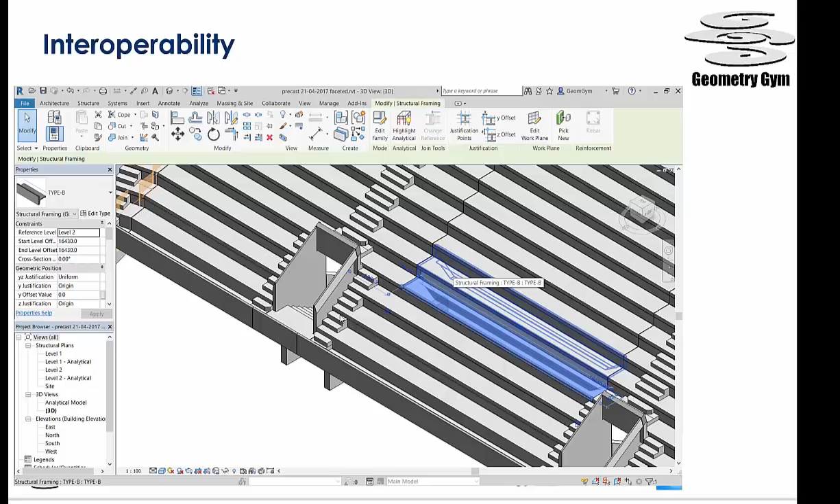So in this particular case, we did have to run the IFC through a small modification process in Rhino just to give us the faceted resultant geometry, because some of the Boolean operations that Tekla was doing, Revit just wasn't able to handle. So Revit has a whole bunch of limitations and constraints, which are often the reason why it's not necessarily selected to create fabrication models like this.

There also is a bunch of work about extracting structural analysis, BIM to structural analysis. I have a few plugins. Again, I guess I've been able to create a core part of code and then reuse it with various interfaces for multiple purposes.

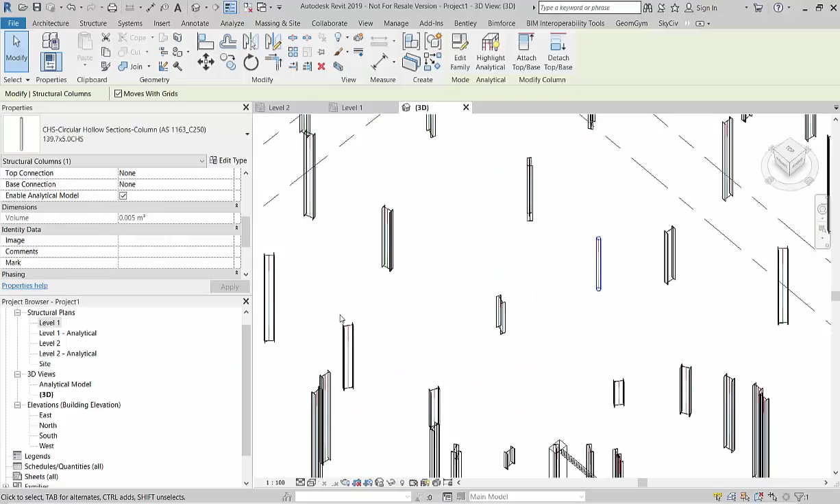So I do have some Revit plugins that actually exchange with SAP2000 and ETABS and Straus7 and a few other different structural analysis applications without requiring you to try and weld all the nodes and do a lot of manipulations of the structural analysis model directly in Revit.

There's also something real - if IFC is capable of this, then the coordination model view is basically a small subset of it. And I think there are some really interesting enhancements with Synchro and various other things about how we actually better use 4D and 5D and beyond information in Revit.

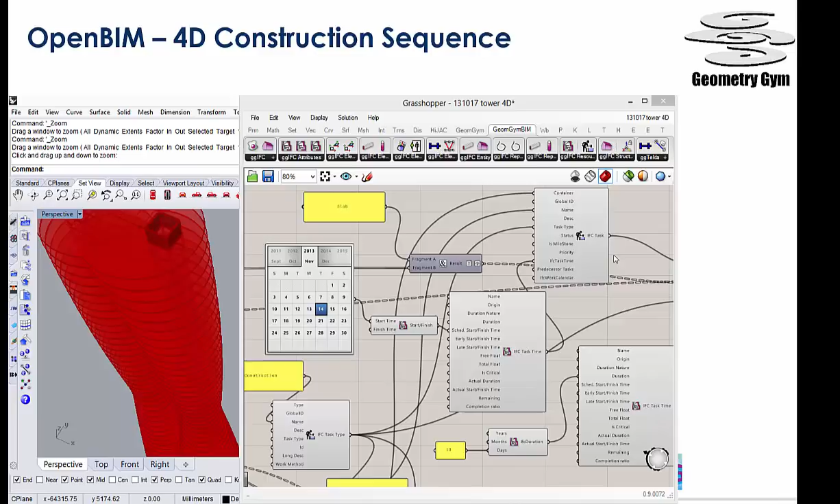Here you can sort of see what I call a Grasshopper Gantt chart, where you can actually start to set up tasks and schedule or sequence them through the IFC concepts, and then use something like Synchro to produce an optimized schedule of those tasks.

Again, I have a Navisworks plugin which does basic enhancements. So Navisworks doesn't recognize colors, and it also doesn't recognize the 4D planning information. So you can effectively run a second loop of the IFC file with my plugin and get some of that information enhanced into the Navisworks model as part of that.

So I guess a few points. As I said, it's really great to come to Holland because I've definitely noticed and observed a really good demand for improving OpenBIM. So congratulations to you guys - I can only encourage and support you to do more of it.

The thing is, all the software vendors are businesses, so they're going to try and recognize what they think is going to keep their business growing, retain their current clients, and get new ones. So the more pressure you can put on them to provide better implementations, the better their software support is going to be of IFC and OpenBIM.

So if you can demand better from your software vendors - I think demand for better validation tools. If you're frustrated, you shouldn't have to understand IFC to the level I have, but you need better reporting and validation tools to try and do this. Demand IFC 4 certification - these are some conversations that I've had.

It's not just all on the vendors about this. Certainly Building Smart are trying to quickly learn some lessons about how we do this better for IFC 5, and support Building Smart - I can only ask for that more. I know James Burke, the guy that did that video I showed, said IFC is free. Well, it would be lovely if that was the case, but Building Smart certainly also needs support. So if you can do that, I'd certainly encourage and appreciate it.

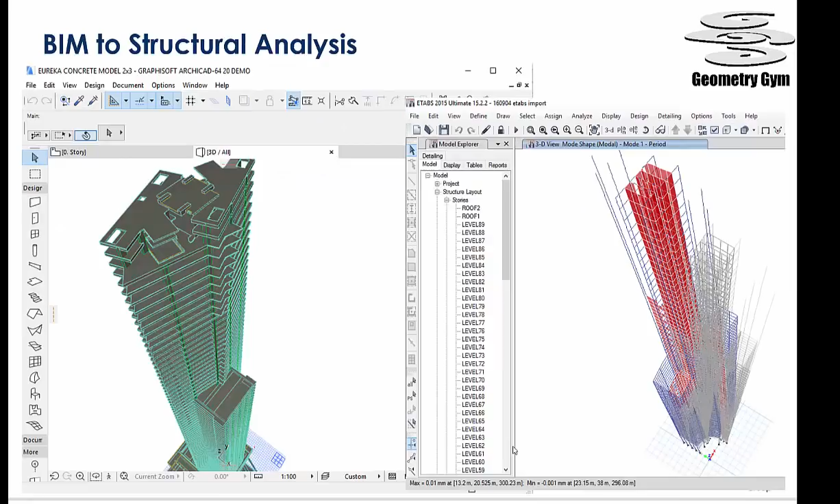Okay, that's some really good questions. I've done a little bit of work on this - even it's how do I know what I can rely on? If I'm the engineer and you're the architect, I can rely on your honesty to tell me what's changed since you last gave me a model, or we can have different validation tools which can actually tell me what's changed. I describe myself as a trailblazer or a prototyper, and hopefully by showing some of these concepts and workflows, I'm helping you know what to ask your big software vendors to actually implement and provide us better, more robust tooling that comes out of the box with the applications you use.

So I certainly have done some work on how to detect changes between two IFC files. That was actually used a lot on this Stadium project. Instead of updating the whole model, we could say here's your last IFC model, here's the one you've given me today, and then write out a third file with just the changes, and then push just the changes into Revit.

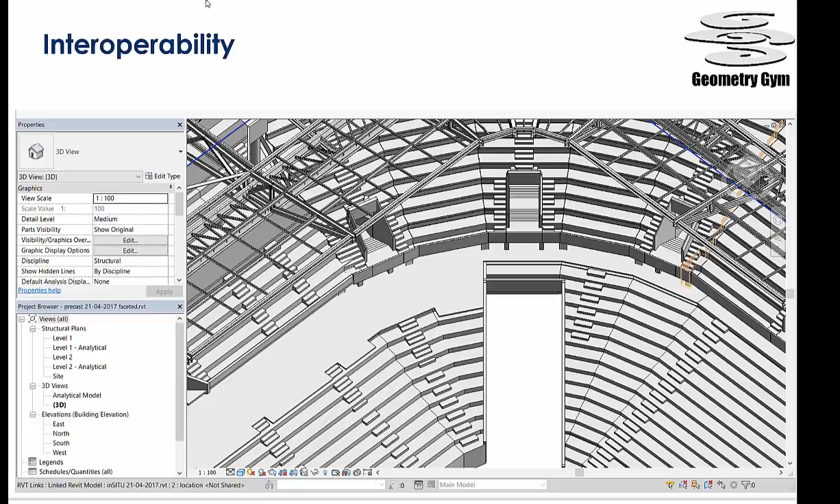Okay, thank you for the presentation. There's a lot of people working with project libraries - actually manufacturers are making new objects which are then also going to the tool and other properties. Do you have a certain ID or a PIN, or in general how they should go? I know this is a very broad question.

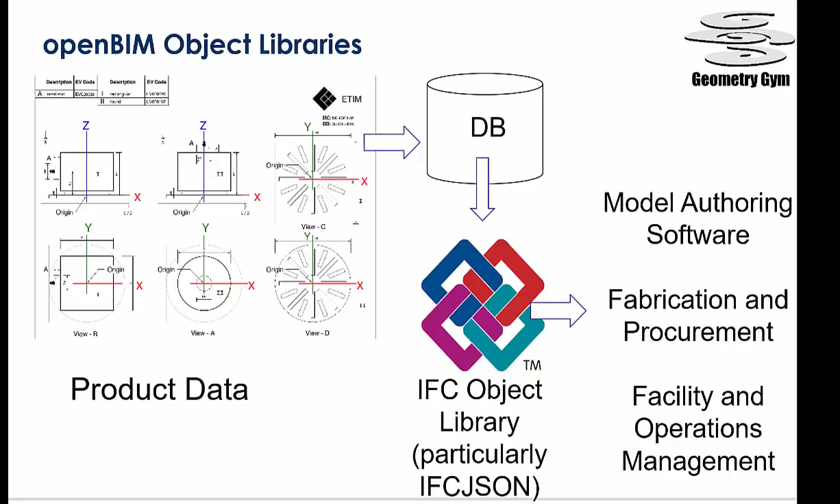Well, I deliberately didn't touch too much on this, because the work I've done has primarily been with Mark and Martijn, so I'm pretty sure they can talk about it a lot here and don't necessarily need me to. But I certainly have given some technical support to BIMforce with the work on the Uniform Object Library. I'm a strong advocate that if a government wants to produce an object library, there's no way they should have to give a Revit RFA file. They should have the definition of their objects and their properties and the templates of the properties, and that should be able to be input into the different authoring software that the consultants etc would want to use.

I think the big benefit you get from this - and this is a whole different presentation - is that if the end user can actually configure various inputs on that object library, the better. That's part of the reason why people produce object libraries and they aren't used anywhere near their full potential. The end user wants to configure whether it's hosted or non-hosted, the language - French, Italian, Dutch or whatever - materials, styling, or their own templates. If you just download an RFA file, all those decisions have already been made for you.

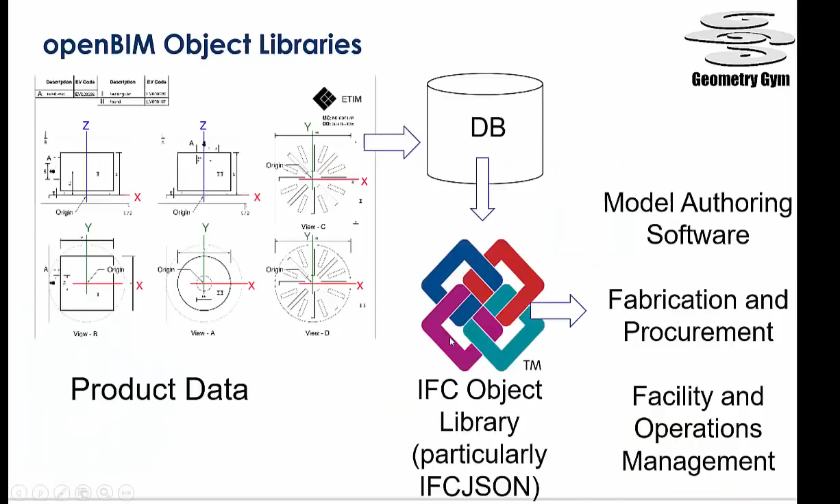I'm sure Mark and Martijn will touch on this a bit more in our second session. I'm a big advocate - we did this proof of concept work for the Uniform Object Library. You can have connectors and ports, you can have constraints, you can even define constraints in IFC4. They still need improvement, but you can actually flex the objects and content you create out of an IFC definition - we even did the annotation. IFC is capable of a lot, but we need industry to push the software vendors. I know we're speaking with DDS, and hopefully they've been very interested in further improving - they've been involved in this project as well. Hopefully we can build some momentum behind it.

If you want to know more, John has a next session together with Martijn where you'll definitely touch on this - what it requires, how it actually works, and how it will basically liberate the industry.

Other questions? Still none? He's here now - when is he leaving? He's booked until he leaves, so you've got today until this is finished. I am coming back up for BILT in Edinburgh as well, and whether we get back to Holland later in the year, we'll see. But maybe it'll give you a chance to digest some of the stuff I've spoken about, and we can follow up - obviously we can do stuff online too. Mark and Martijn, particularly on the object library across this - and you've got a lot of IFC experts, Peter and various others around here, so you can be strategic and technical backup to some of those guys in areas they're not necessarily so familiar with.

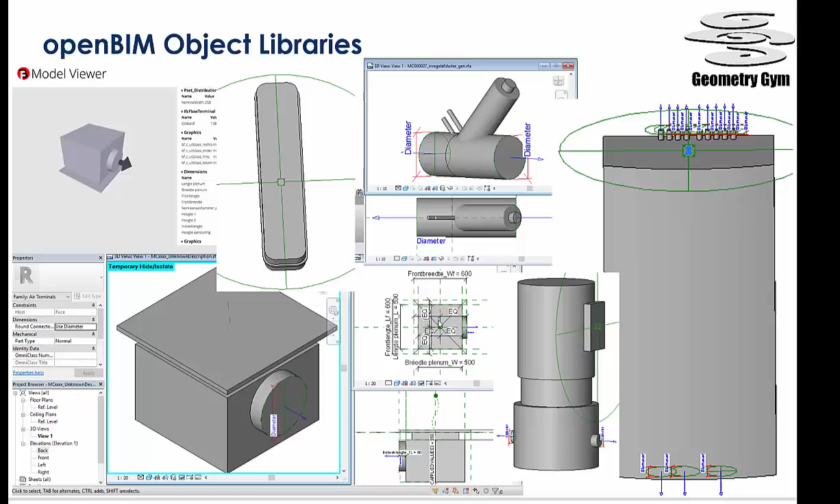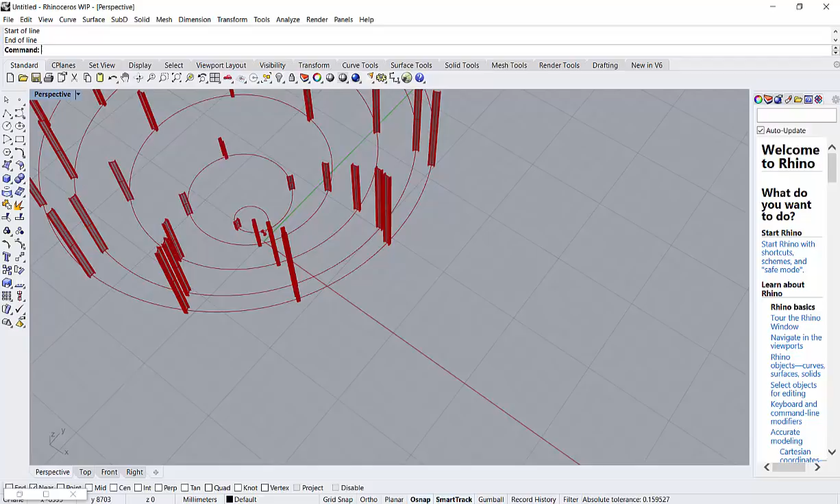How does that work? Well, you've got like 50 minutes coming up - 15 or 50, 40 in the next session. But I mean, it's interesting - do you mean BIM in Rhino itself or Grasshopper? I'm talking about the Rhino plugin and then using Grasshopper on top of that. So what would you like me to explain further? Is it basically software that I buy somewhere?

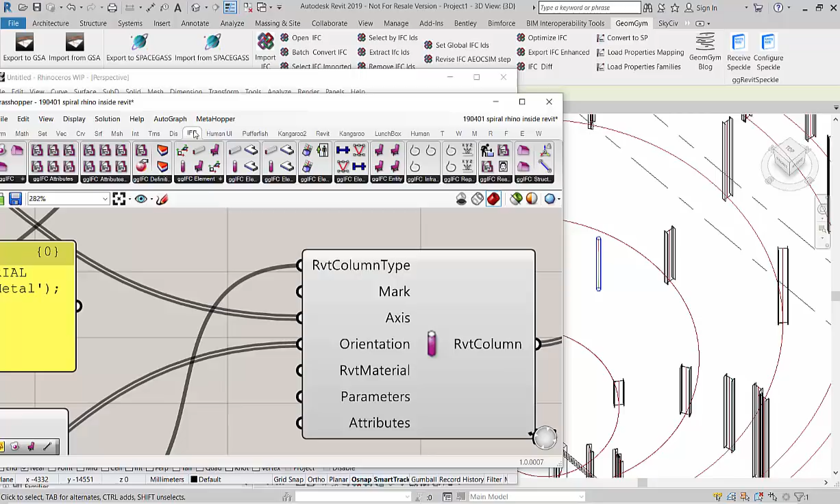That's a good question, it's interesting. McNeel are actually doing their development open source, so this version over here that does a live link is open source - you can download that off GitHub. Mine, I'm a third-party independent, so I rely on revenue streams to support these developments. With my development, you can actually run it inside of Revit or outside of Revit, which I think is one of the other benefits - you can assemble that IFC data model whether it's running in Revit or out. What it really meant was that within a day's work, all these components ran just by writing an IFC file as that bridge between Grasshopper and Revit previously. All it meant was I had to merge my code base - my Revit plugin and my Grasshopper plugin - into one, and just send the IFC in memory between the two. This is about 3 or 4 years worth of work, the components I've done here - sorry, I'm showing the IFC ones rather than the Revit ones.

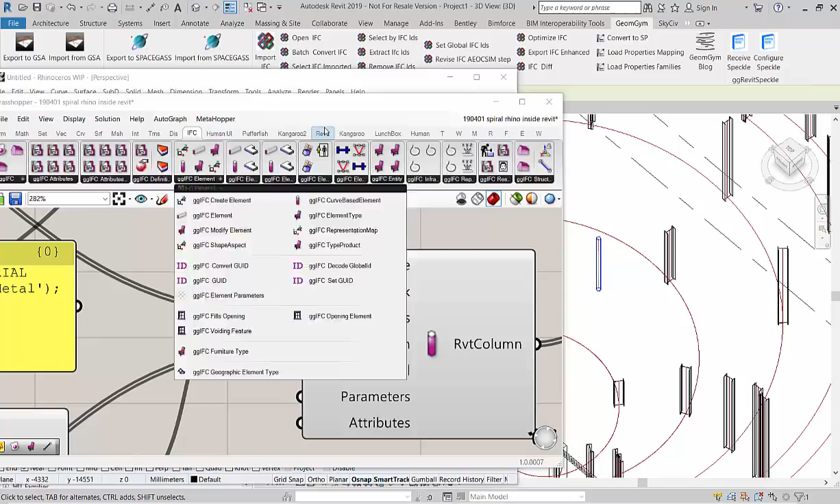All this work's done on demand - users come to me with suggestions, requests and ideas, and I've been able to quickly support many of them with what they'd actually like to generate in Grasshopper and get resulting in Revit. You can download and try this for at least a month for free, and then if you find it useful and helpful, you can take up a floating license to continue its use.